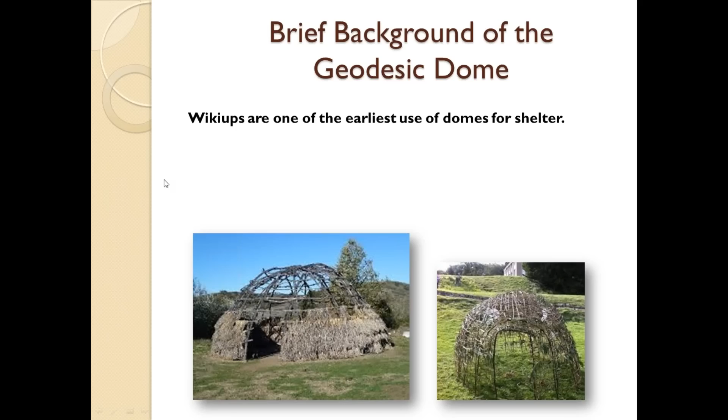So let's start with a little background on geodesic domes. It struck me that the earliest domes, and I did some recent research on this, are actually wikiups. The funny thing is, Justine, my wife, actually built one of her own wikiups. It didn't look too dissimilar from these photos, and it was one of the earliest forms of domes used for shelters. Wikiups are constructed basically using branches from trees and natural materials laid out in shingle format to protect you from the weather.

The wikiup is a term from the indigenous North American Indians, Native Americans, characteristic of many of the northeastern people, but also in the Great Plains, the Plateau, and even California cultures. This was a very common form of shelter, and with the geodesic dome, they didn't even know they were inventing it at the time, but they were getting close.

One of the reasons the dome structure has such appeal is it basically encloses space in the most efficient manner that is mathematically possible. Imagine that - these ancient people discovering such a technology.

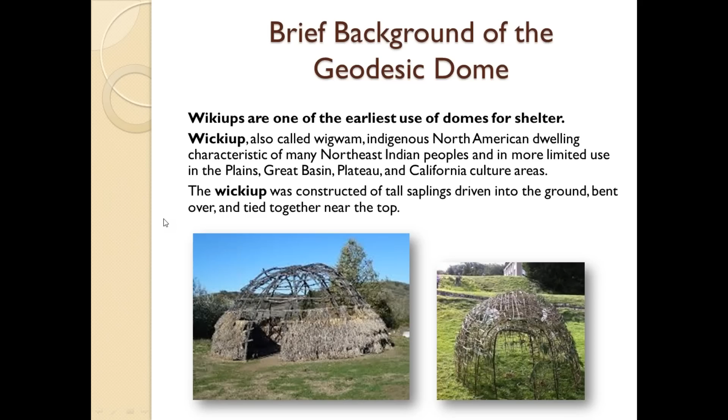The idea here was to basically take tall saplings, drive them into the ground and bend them over, tie them at the top, and then cover them with natural materials, which was surprisingly efficient in keeping the weather out, creating a warm, nice, comfortable environment and a nice living structure. So this was actually one of the earliest forms of the use of the dome format.

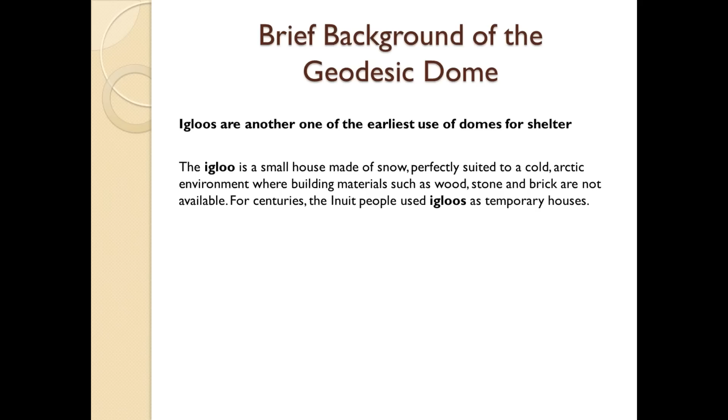Our brothers to the north, historically, many years ago, up to 1,000 years ago, discovered this technology on their own using their own natural materials - they're called igloos. That's one of the earliest forms of using domes for shelter. An igloo is just a small house made of snow and ice, but it's perfectly suited for life in the cold Arctic environment. They don't have any wood or stone or brick, all they have is a lot of snow and ice. This is the cool thing about humans, that they learn how to use what they have in nature.

As you probably know, igloos are one of the classic forms of shelter, and guess what they are? They're domes. Awesome, and they're very comfortable. I've actually built one myself when I lived in the northern reaches of Canada.

But along comes technology, and the person behind it all, or at least the person who's widely credited for inventing the geodesic dome, is Richard Buckminster Fuller. He's widely known as just Bucky Fuller. Buckminster Fuller was an American architect, a systems theorist, a designer, inventor, and I want to point out a very good book you could read, he wrote a book called Operating Manual for Spaceship Earth. That's an awesome book, a little off topic here, but I just thought I'd mention that.

Bucky Fuller created the geodesic dome, and one of the stories I read was that when he was 5 years old in grammar school, they gave him a project to create a structure out of little bits of clay and popsicle sticks. Everyone was making these little rectangular house-shaped structures, and the kids were pretty good at it. But Bucky Fuller, you'll never guess what he did - he started assembling them in triangles, and he basically started creating geodesic domes with these little bits of clay and popsicle sticks. This is a true story.

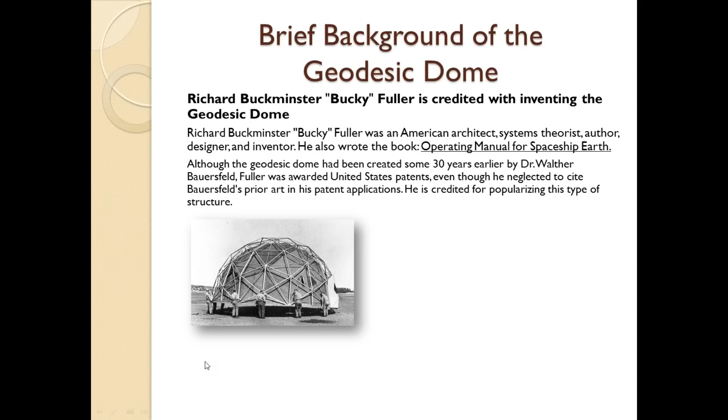Although he's widely credited with inventing the geodesic dome, he didn't actually invent it. Another gentleman by the name of Dr. Walther Bauersfeld invented it technically, but Fuller was the first person to get a U.S. patent on it. Here's a photo of one of his early dome designs, and one of the concepts here was that it's very light - you can build a structure that, in this case, people can just lift off the ground and move.

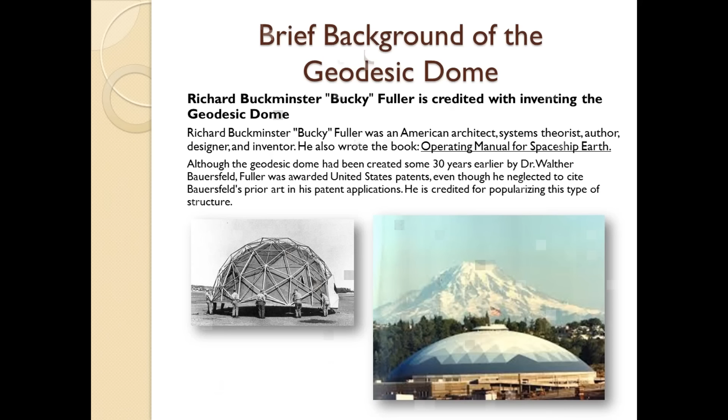It's awesome. Another thing I wanted to point out is that domes can be large. One of the largest, actually the largest wooden dome in the world, is based right here in Tacoma, Washington. You can see that dome, and that's actually Mount Rainier in the background. It's just awesome that people can come up with these ideas and over the years evolve them technically, adapting to local materials, and finally build one of the largest structures in the world made out of wood, or at least geodesic dome structures.

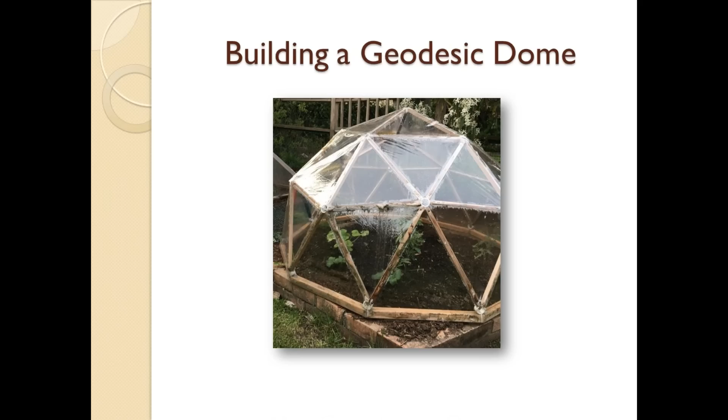So now we're going to get into it - how do you build a geodesic dome? What I'm showing you here is a photograph of the geodesic dome that I recently built in my backyard, and I use it basically as a mini greenhouse. You can see from the photo that it's not very large, this one is about 40 inches in diameter, but it's been a wonderful experience building that dome.

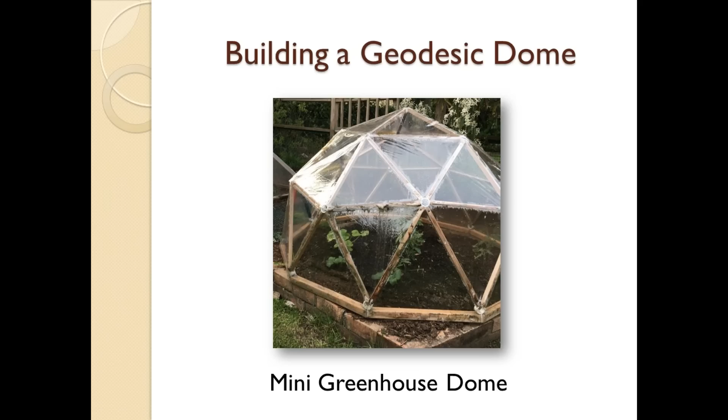What I did is I made it into a little greenhouse, so you can see the gardening underneath it. In a future update, I'm going to show you some photos of the results of this. I planted tomatoes and some other plants in the greenhouse, and at the same time I planted the same exact seed stock and the same exact plants in my normal planters, and watched them grow. In the course of a couple of months, you'll be surprised with the outcome. I'll show you that in a future session here.

But one has to understand the background of the mathematics, so please allow me to elucidate a little bit on the mathematics of the geodesic dome. I find it fascinating, and I'm sure a lot of you will as well.

You don't really have to understand all this mathematics, because I'm going to go through a very step-by-step how to cut the pieces at what angles and put it all together. But the mathematics of the dome basically derive from a very ancient discovery, if you will, called Platonic solids.

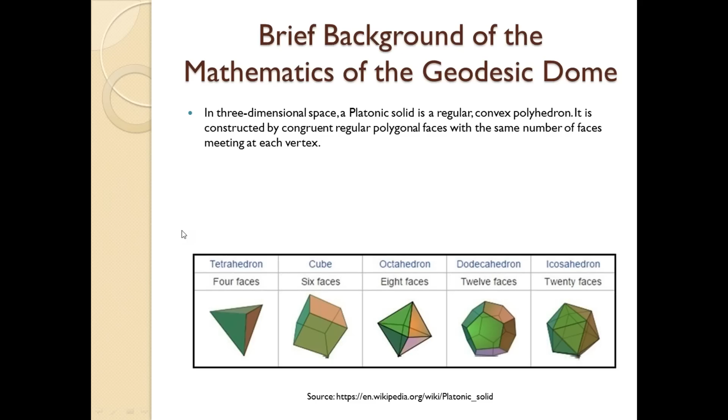Platonic solids, to put it in normal day-to-day terms, is basically a geometrical enclosure that all uses the same length of sides, and it encloses space with the least possible number of pieces of material. They also happen to have the same number of faces meeting at each vertex. This is amazing. This was discovered thousands of years ago, in fact by Plato the philosopher, the ancient Greek philosopher, who theorized on a lot of different things, but he was credited with discovering this idea of Platonic solids.

So let's walk through some of these. The tetrahedron is the most basic form, and it consists of the fewest number of pieces. Basically what it is, 4 triangular pieces put together, and it creates a little kind of 3-sided pyramid. Very unique. There's only 5 ways to enclose space like this.

This is a real key concept. The next most complex structure of this type is the cube. Now, we're all familiar with the cube. Western world lives in cubes. For some reason, we adopted that as our kind of living space geometry, and we basically live in cubes and rectilinear prisms that consist of cubes and their counterparts.

And it's interesting to see, just to compare it to the tetrahedron, if you look at that, that's almost a teepee—add a few more poles, you got a teepee. Now the next one up is the octahedron. It has 8 faces, basically 2 4-sided pyramids facing each other at the base. Each of these is very unique, and they use exactly the same length struts or pieces of material, and they enclose space in the most efficient way.

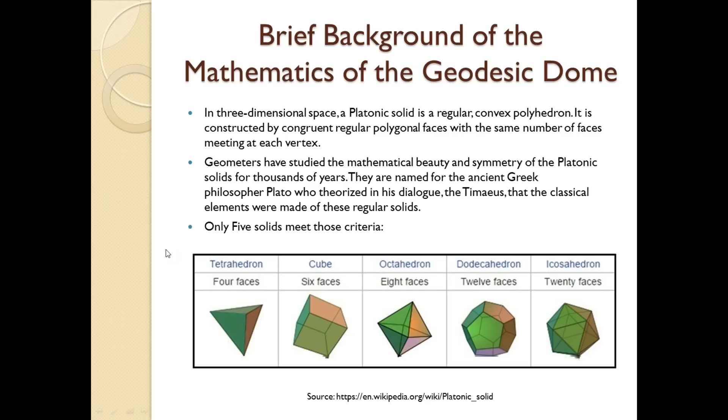So you might be wondering, okay, but where do I get the geodesic dome from all this? Well, that's my next point. Remember, only 5 geometric solids meet these criteria. That's a key concept. Perhaps in a future webinar we'll get into some of the attributes of those and why that's important in other areas. But in 3-dimensional space, a Platonic solid is what's called a regular convex polyhedron. That means it has all the same length pieces of material to construct it. There's only 5 ways to do this in the whole universe. It's amazing. Basically each of these faces meets at each vertex, with the same number of faces meeting at each of the intersections.

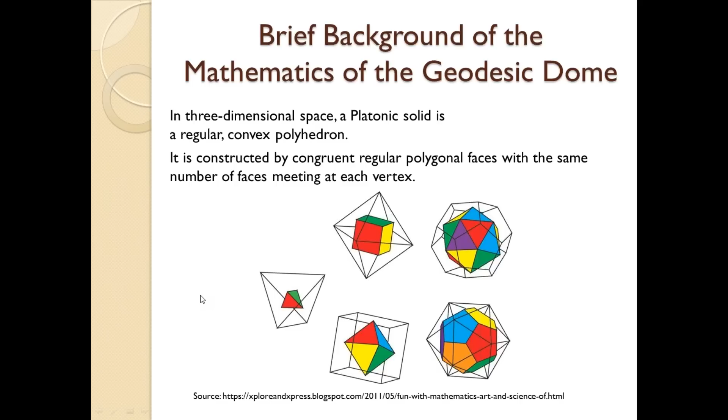Let me go back to that for just a quick second—I just want to share this visual with you all. So you can see here we're starting to look at the 5 Platonic solids and how they might be used together, which is a key concept here. When you start looking at them interlaced or overlaid amongst each other, you'll see some very interesting things emerge. So dome mathematics consists of a variety of different dome designs, and the 2V geodesic dome is what I'm focusing on here, which is the simplest of all the domes.

So it's a good place to start if you're a new dome builder. The 2V geodesic dome is the mathematical intersection of the icosahedron and the dodecahedron. I've taken this on as my social media avatar for a little while here—I just love this photo, this diagram. It shows you in the center, the colored shape is the icosahedron, 20 equilateral triangles all connected together, and it's enclosed by, in this case, a dodecahedron. This is in fact the mathematics that allows you to create the first geodesic dome—the mathematical intersection of 2 Platonic solids, the icosahedron and the dodecahedron.

Now, if I'm losing some of the audience due to the depth of the mathematics, don't worry—we're going to get into the nuts and bolts and how-to. You don't really have to understand this. I just personally find it fascinating.

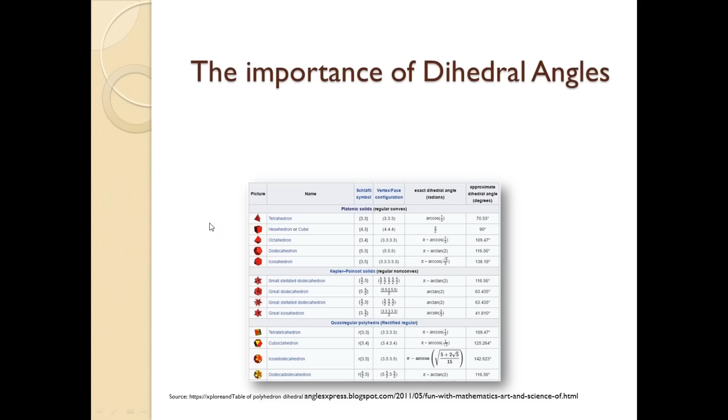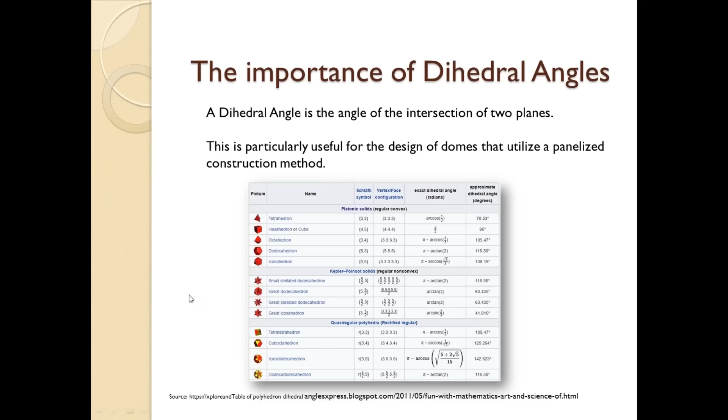Now, another important aspect of building domes, or for that matter, any structure or geometrical shape, is the importance of what are called dihedral angles. These are the angles at which the planes intersect. It's the angle between the intersection of two planes, and this is crucial if you're going to build a dome that utilizes panelized construction, because the intersection of those two planes represents the intersection of two pieces of wood, plywood, or other material, and you have to know these angles.

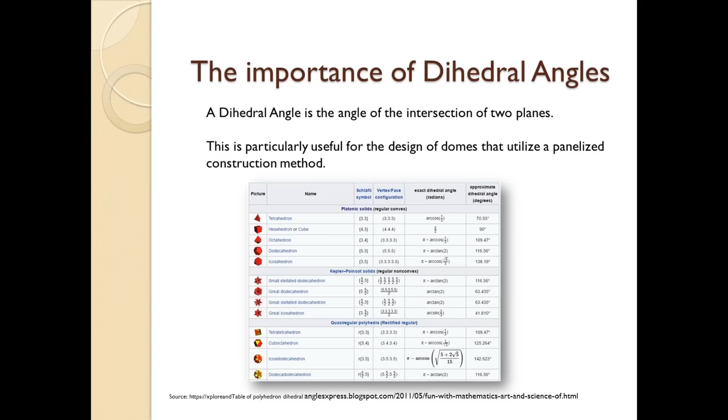But the importance of the dihedral angle is just something to really get your mind around. It's the angle at which these planes intersect. All right, we're on a roll now.

The hubs themselves, I have a patent pending concept on, and that is the use of a very simple concept: a PVC pipe section cut to a short length matching the width of your material, in this case about 2 inches, used as the hub. The key is it does not require high precision in the cutting of the struts and the construction of the dome. The other aspect is I came up with the idea of just zip tying them to the PVC hub. It works great, I got to tell you.

The hubs I used when I created the dome in Oregon at the original institute were just sections of steel pipe. I hadn't thought of using PVC pipe at the time, so I just drilled holes in sections of steel pipe at the right angles, and it allowed me to bolt the poles from the forest in the same fashion. You can use any material you might think of.

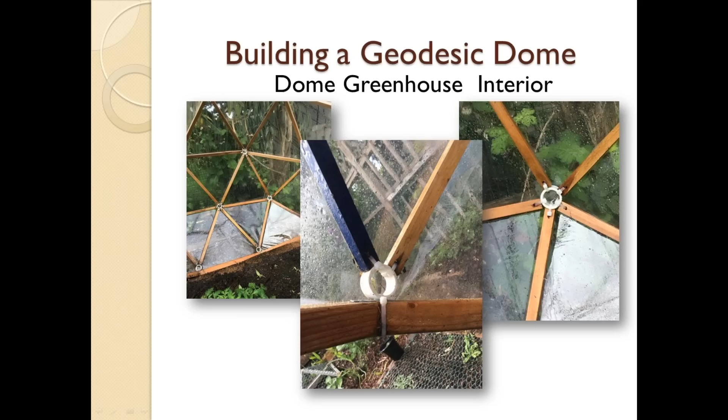I'm going to repeat that for you. A circle is merely a polygon, a multifaceted shape, with an infinite number of sides. So a polygon just breaks it down into a certain number of sides. In this case, a regular 10-sided polygon. And it's called a decagon if you want to impress your friends. You say, oh, I learned about decagons in this webinar last night.

So if it's a 360-degree circle, we all know what that is, I think, divided by 10 is what? 36 degrees, right? So that's 360 divided by 10. So that gives you the angles of these intersections of these struts. And we'll get into a little more detail on that later. Awesome, though. It's just fun to play with this stuff. And as you start designing your own domes, you get out your protractor and your ruler and your calculator and have a lot of fun doing it.

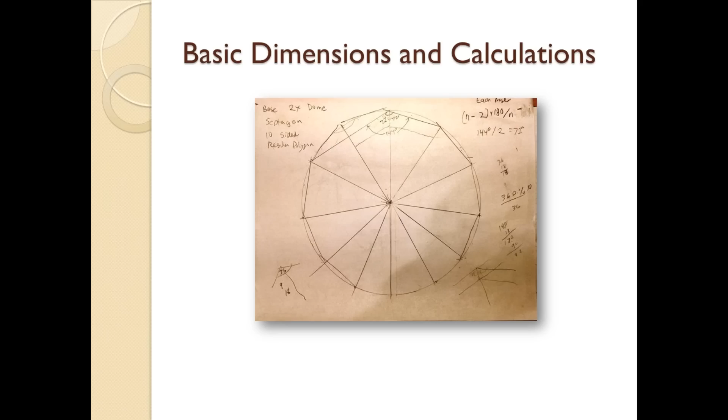Simple stuff, though. This is how to calculate the basic dimensions of the base of the dome. Because after all, that's what you want to do first, is decide where you're going to build the dome. In my case, I had about a 40-inch planter, and I wanted the thing to fit right over it. So I made the radius 20 inches. But what we're going to focus in on is actually the radius of the dome. Now, the radius is merely the distance halfway across the circle from the center to the outside edge of your circle or your polygon here. Radius is half the diameter, if you will.

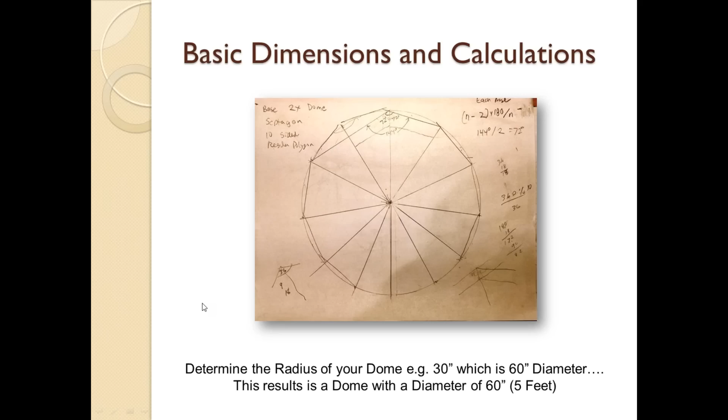So the key thing to keep in mind is figure out the diameter of the space you want to close and just divide it by 2. That's your radius. Why is that important? Well, I'm going to show you. But just parenthetically, in this case, if you used a 30-inch radius, which is a 60-inch or 5 feet diameter, then what are you going to create? A dome that sits on a space that's 5 feet wide. Awesome. Hope you're all enjoying that. That's some good math there.

All right. So let's take a look at what you get and how we derived all this. Now, if you really like doing math the hard way, you can figure all this out using geometry and Pythagorean theorem and a few equations like that. But really, I'm going to make it simple for you. And what this breaks down to is a 60-inch, 5-foot diameter dome, which has a radius of 30 inches. By the way, you might make that feet. You want to build a dome that has 30 feet radius, you can do it. It's the same concept. Just remember to scale up your material accordingly. So these things you can use as reference if you choose to build this exact size of dome.

But the most important thing is that you'll see that there is a link here to a calculator. And I wanted to give credit to Geo-Dome and all the wonderful folks there in the United Kingdom that came up with this wonderful website called geo-dome.co.uk. And they have a wonderful calculator that just lets you input. In fact, let me just go to that. I'm just going to show you that for a moment. Let's go to that calculation tool.

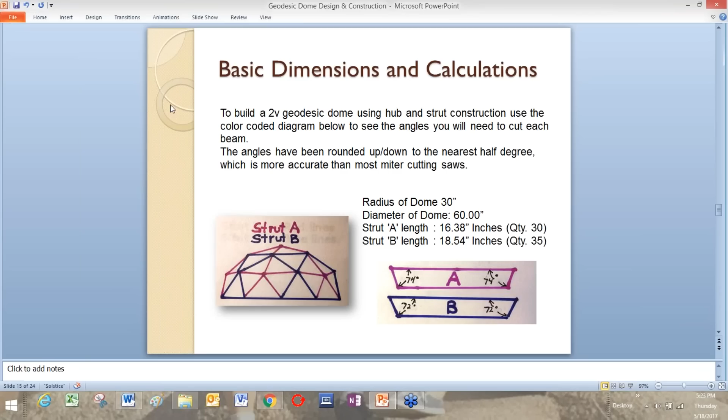So here's the website, geo-dome.co.uk/2v_tool.asp, etc. All you have to do in this little calculator tool, which is a beautiful thing, is put in your radius. Like if I put in 30 and say calculate, it will give me the strut lengths and the diameter and the surface area and the floor area, all these things you need. If I put in 75, you can see it gives me different strut lengths and so on. So when I'm talking about that, that's what I'm referring to. Pretty awesome. So I just go back for a minute. That's the link that's in this PowerPoint.

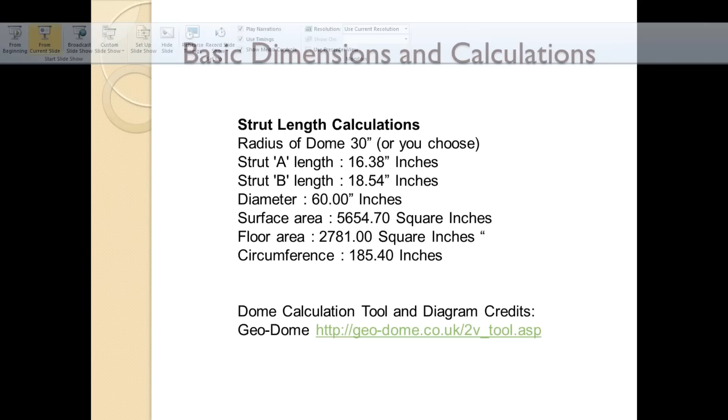So the basic idea is you have to create essentially a half circle if you want kind of a half of a sphere of a dome. So if you look here at this diagram that's color-coded in 2 different colors, you can see that it kind of approaches the half of a sphere. Now there are other dome styles. You could create a whole sphere. I don't know what you'd do with that because it would be hard to sit on a level area, but this is a great one.

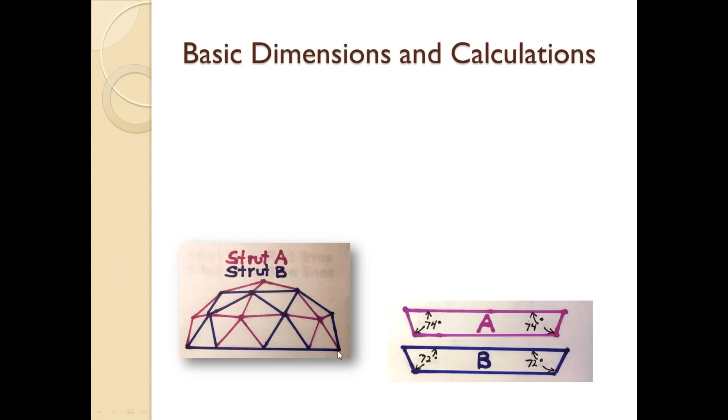This is exactly what I used when I built the dome at the Institute of Essential Knowledge in Oregon. I did put a little 4-foot rock wall base around it, which, by the way, you can do. You can put any kind of base you want on this. And I created the struts according to the length from that calculation tool or through your own calculations. And you can see what those struts are.

I've given you the length in the prior slide, but you can see here that this says it's 74 degrees on the A strut and 72 on the B strut. They're color coded, so the base is all B struts. You need 10 of those and so on.

Now, I'm going to get into tools here in a moment, but if you're using a chop saw or a radial saw, miter saw, you'll actually be using the inverse of that. So 16 degrees would be what you set your saw at, but I'll talk a little bit more about that later. In any event, what I'm trying to do is give you some very practical step-by-step instructions on what you need to build your dome. The main part is actually building the struts, sawing them at the right angle.

Now remember, you don't really have to be to the 1 degree accuracy or even half a degree. That's more accurate than almost any of us can saw manually, certainly more than even power saws can. So get close, 74, 75 degrees, 15, 16 degrees, we're close enough for dome work. So in this case, again, the radius of the dome of 30 inches gives you a diameter of 60 inches or 5 feet. The strut lengths are about 16 inches or so for the A struts and about 18.5 inches for the B struts. And this shows you how many you need.

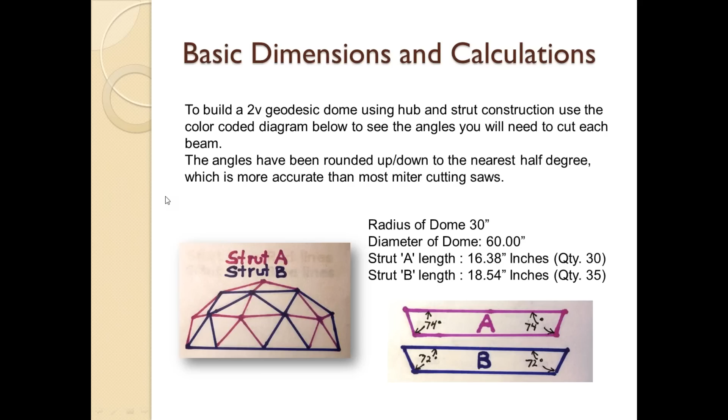One of the questions I get is, what does it cost? Well, do the math. It's like 20 cents a foot, or maybe you salvage the lumber and you just buy some PVC pipe. I'm going to talk about that now. The materials needed: you need 30 of the A struts, 35 of the B struts. You need 6 5-way hubs and 10 6-way hubs.

Now these hubs are nothing more than like a 2-inch section of PVC pipe. In my dome, I used 1.5-inch length hubs. You literally just cut them with a saw or a hacksaw or chop saw. And when I say 6 5-way hubs, that means that there's holes in them spaced around the circle of the hub, 360 divided by 5. If you're using 6-way hubs, it's 360 divided by 6 to create the hole pattern. I have another diagram on that in a moment.

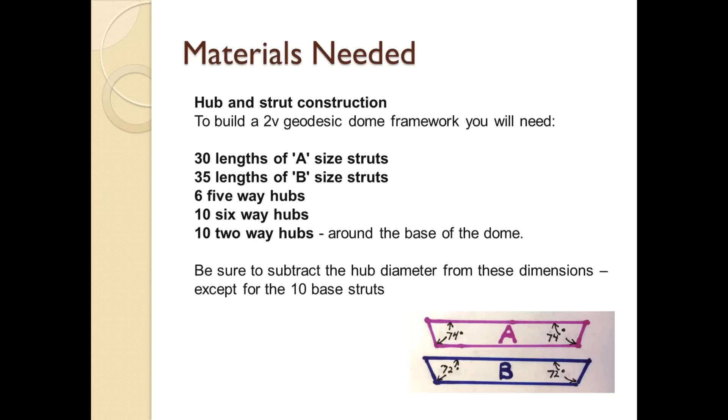And you need 10 2-way hubs, which form around the base of the dome. And we can go back to that if we need to. But here's a very, very important thing. If you're using my construction method using zip ties and the PVC pipe hubs, be sure to subtract the hub diameter, say a 1.5-inch diameter PVC pipe, from these dimensions, except for the base struts.

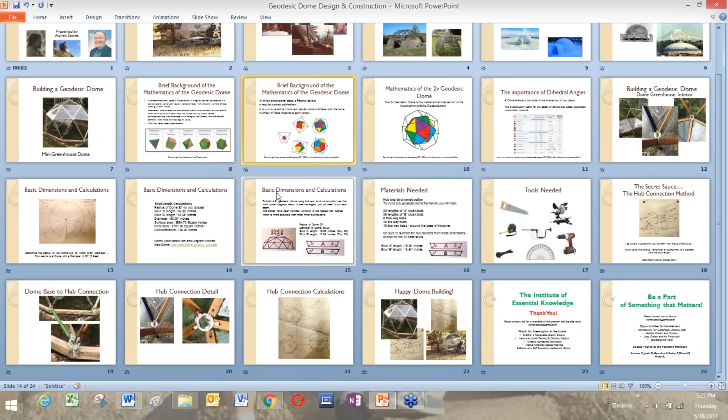Actually, while we're thinking about that, I'm going to go back and explain that while we're looking at some photos here that I referenced earlier. So a 5-way hub is shown right here. All I did is I made holes in the PVC section, 5 of them evenly spaced around the hub. Literally just drilled it with a drill press or a drill.

And on the base, though, it's a little different because you don't need 5 or 6. You just need the 2-way. So keep that in mind as you think about building your dome.

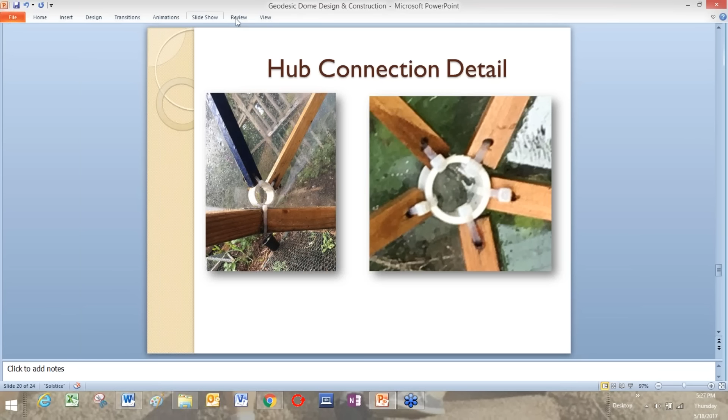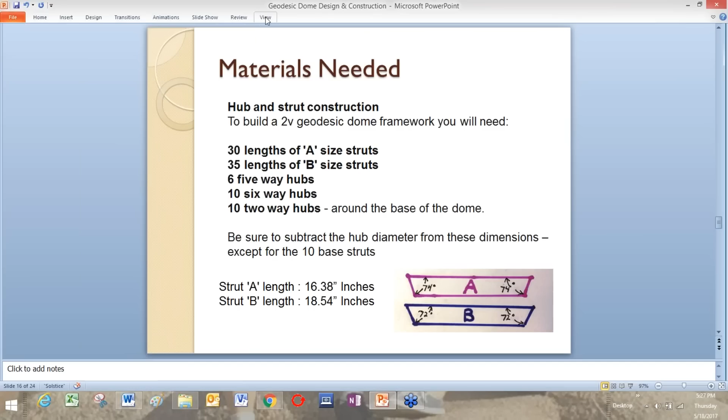So that's the idea of the raw materials needed. So let's go in and take a look at the tools needed. Good news, you don't need a whole lot. You could actually build this entirely using hand tools. A hand saw, got to have some way to saw the pieces of wood and the pipe sections.

But you know what I got for about 150 bucks is this thing. It's awesome. It's a chop saw basically, but it has miter cuts available in it. You can actually do dihedral miter cuts, 2-way mitering, so that you can create panelized construction. But I digress a little bit. Saves a lot of time, but not needed. You can just do it by hand. Maybe you prefer that. Another thing you need, of course, is a tape measure.

And if you don't want to use a power drill, maybe you want to experiment with just doing this all by hand, there's a thing called a brace and bit. Extra credit for those of you who have actually used one of these. This is what a drill used to be. Of course now, and I will admit what I used is a nice little electric drill. It's good to have either an electric drill or even a cordless drill.

You'll also need some zip ties, enough to go around. They're super cheap. You just buy plenty of them. I actually bought the white kind because I thought they looked better, but they didn't show up on my white background, so I showed a picture of some black zip ties. These are just zip ties. You buy them at any hardware store.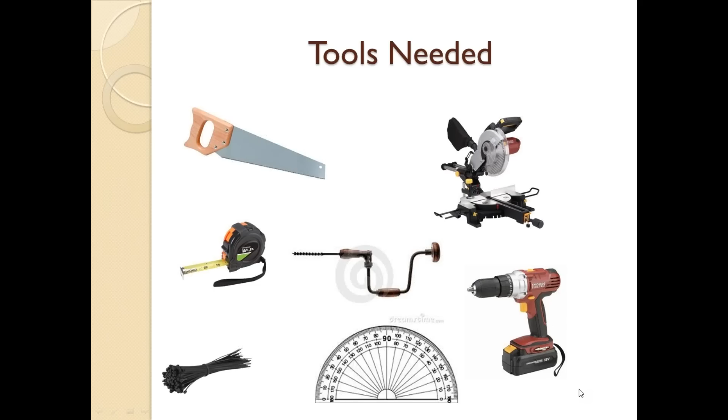And last but not least, you need a protractor or some way of measuring the angle of your cuts, which is built into one of these power saws, by the way, typically. So this is all you need. It's all really basic tools. Won't cost you a fortune. I think I put about $100 worth of materials into my dome, and I already had most of these tools, so it was pretty awesome.

Now, are you ready? Drum roll, please. I don't know if you can hear that. This is the secret sauce right here. This is the hub connection method, which I am claiming copyright on, and I'll be working on filing a patent on. So this is my invention disclosure at this point. And this is what I consider to be the secret sauce.

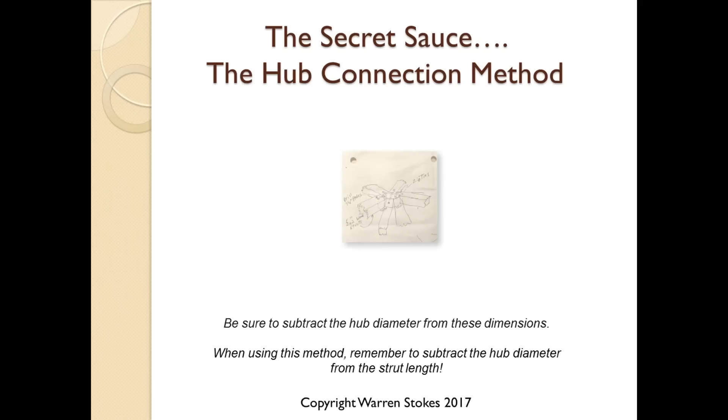I came up with this idea kind of out of the blue as I was just toying with ideas, and here's what it is. It's this idea of creating a section of pipe. I'm saying PVC pipe for the sake of discussion, but it could be any pipe material cut to about 1.5 inches length, the length of the hub, piece of pipe, if you will. And then these holes are just drilled around it in 5, 6, and 3-way hole patterns.

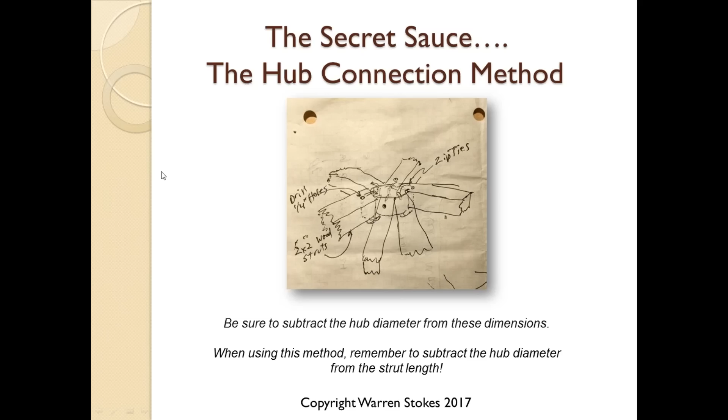Awesome. Now these struts themselves, these are those angled pieces of 2x2. You just drill a hole in the end and you attach zip ties to each one of them, and it's just freaking amazing how well that worked. So I'm very happy with that. I'm glad to share that with all my friends and family and people in the Institute or interested in this whole concept. So this is the secret sauce. This is what you've been waiting for. That is the key to this whole construction design.

So as you start looking at what you're going to be doing, you're going to be creating a base. Along the bottom here is the 10-sided polygon. It's kind of like a circle, 10-sided circle made out of 2x2 sticks, if you will. And here's the little PVC hub connections, each connected by zip ties to each of these different patterns. And remember to go back to the original blueprint to determine what size hubs they are, what length, and what angles you cut them.

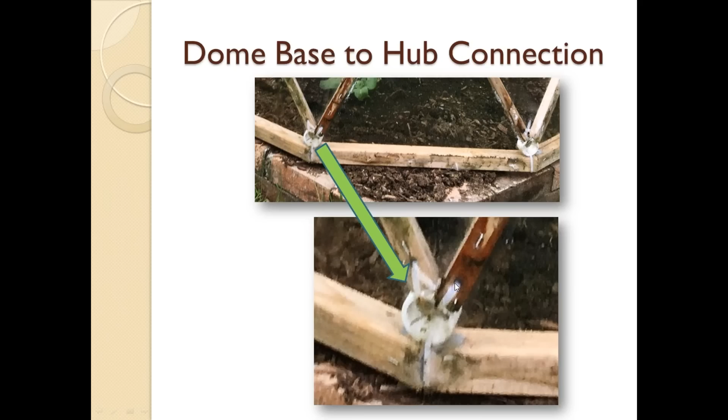But that's it. Now, if you take a close look, you can see how this is constructed at a little more detail level. So you can see the hub, piece of PVC pipe, in this case 3-hole pattern, and zip ties. Amazing. All right. And again, if you look at this from the standpoint of the finished dome, here's what it looks like from the inside of the dome on the base along the bottom, and these are just the 2-way struts coming out.

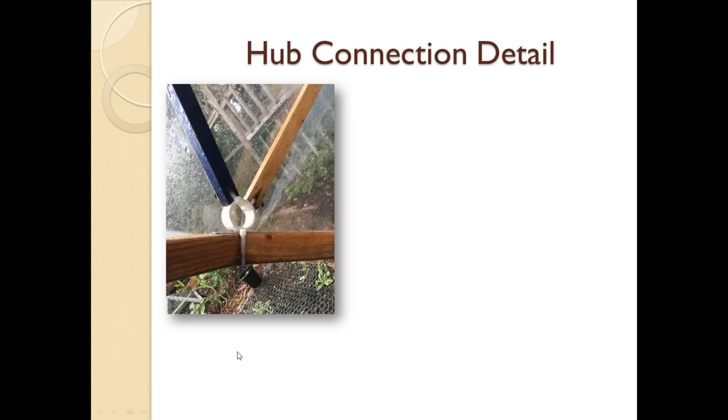By the way, it is useful to color code your pieces of material. You can use tape, felt marker, paint if you want to leave them covered, but that just helps you get organized and keep things going the right way as you put it together. But this is from the inside base. Here's another photo of the same hub construction for a 5-way hub. There's the PVC pipe. Here are the zip ties, and there are your 2x2 struts.

Awesome. Now, you will probably want to do a little bit of work on how you create these 5-hole patterns. So just get your protractor and a ruler and just do the math. 360 divided by 5 gives you the degrees between each of these. And a useful thing to do is to create what I call a jig for this. So you can just create a construction out of wood, something that circles the hub, so that when you put it in a drill press, it has the hole patterns all pre-drilled. It just saves you having to mark each single hub over and over, because there's a whole bunch of hubs.

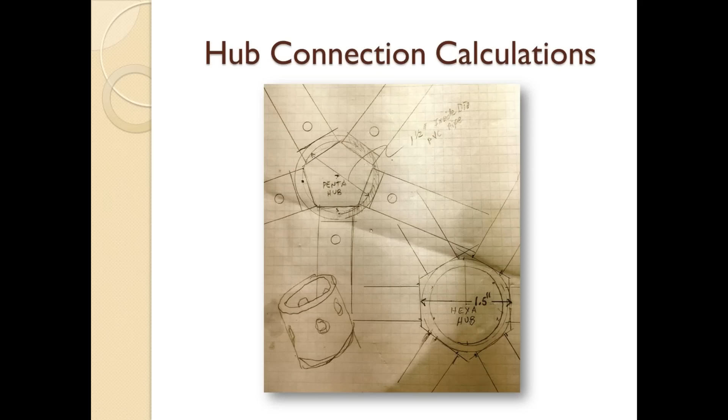Here you go, it's the 1.5 inch. It's a very standard size PVC pipe. You could use white, black, gray, whatever you want. I like white for the sake of argument. It's 1.5 inches, so you know what the diameter is, and just do the math. It's quite easy.